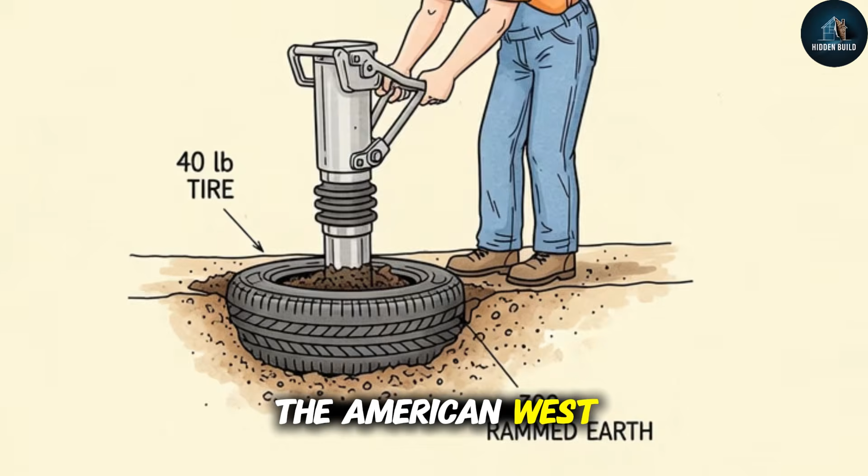The tire weighed 40 pounds. He had a theory that you could pack 300 pounds of rammed earth into it, stack hundreds more just like it into a thick curved wall, and build a structure so thermally massive that it would hold a spring morning's temperature through the worst blizzard New Mexico could produce. No furnace, no air conditioning, no utility hookup, no bill ever.

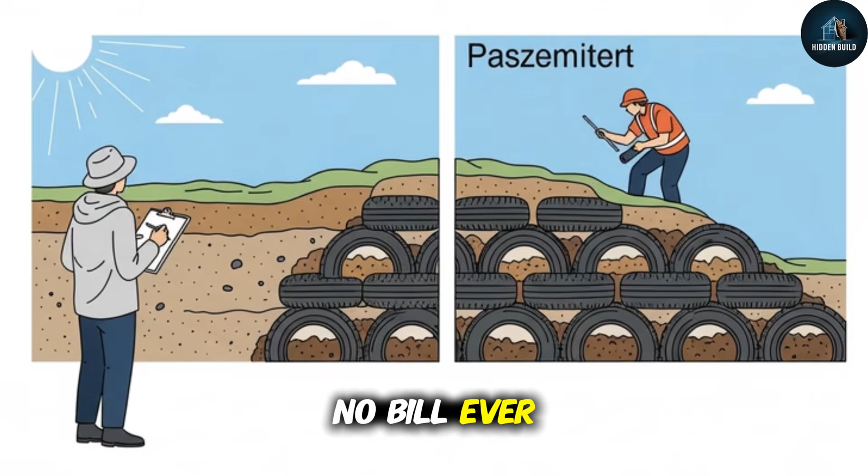He tested it. It worked. He tested it again. It kept working. Over the next 17 years, Reynolds built 32 of these houses in the desert outside Taos.

In the winter of 1993, a National Geographic photographer visited the Earthship built by television actor Dennis Weaver in Ridgway, Colorado. The temperature outside registered 8°F. Inside, 70 degrees, no furnace running. The photographer told his editor the instruments must have been wrong.

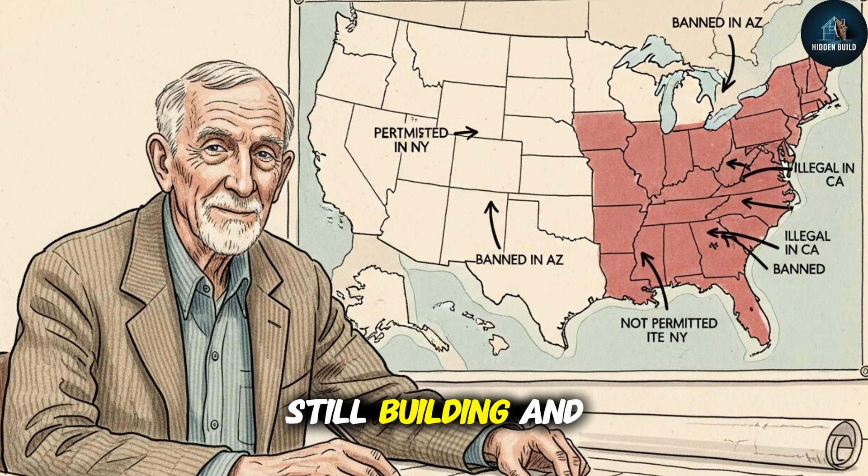His editor agreed. 53 years later, Michael Reynolds is 79 years old, still building and still banned in 48 states. The houses are still warm. This is the story of the house that heats itself forever, and the architecture license they revoked to make sure you never build one.

The archive opens outside Taos, New Mexico, in the autumn of 1974. Reynolds is 29 years old, freshly suspended from architectural practice for the preliminary work he has already done, and he's building what will become known as the Thumb House. The budget is $6,000. The primary structural material is used car tires collected free from the same garbage dump where the idea began. The construction method is not complex.

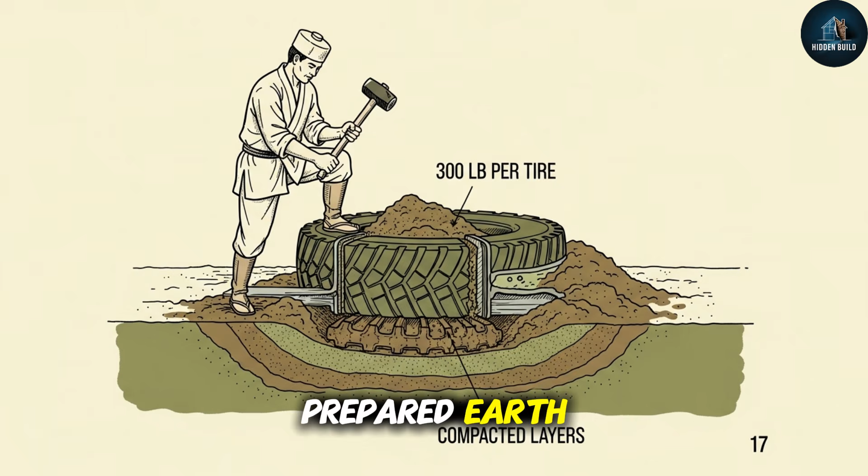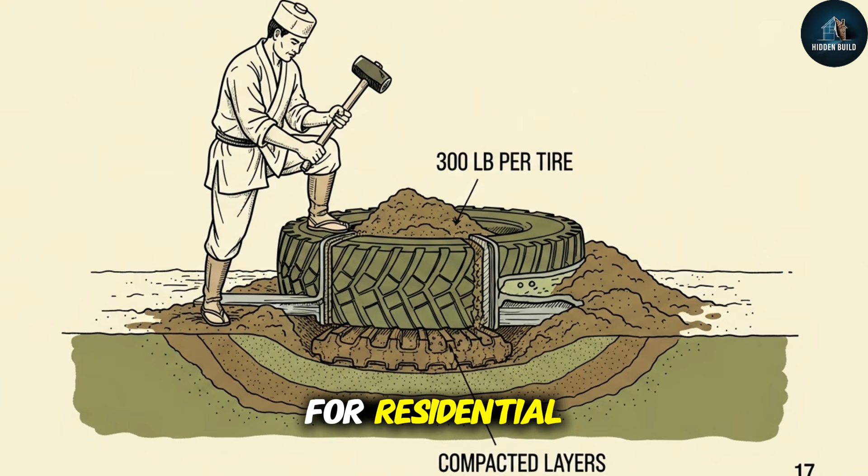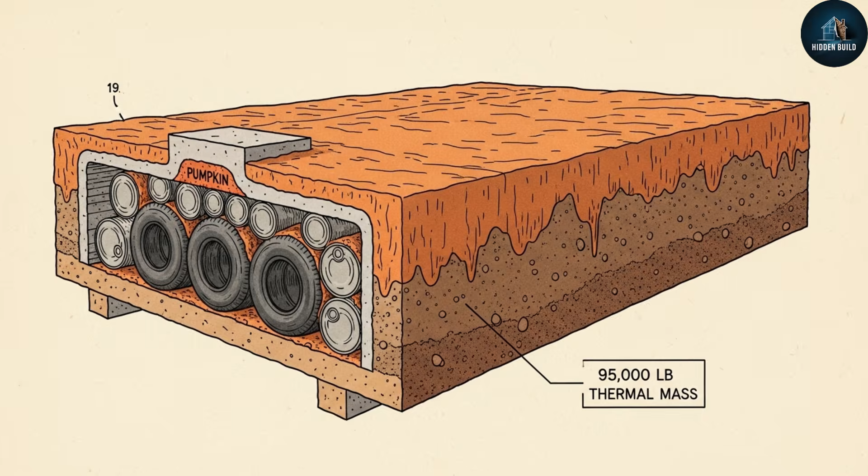A tire is laid flat on prepared earth. A sledgehammer drives loose soil and subsoil into the cavity of the tire - 300 pounds per tire, compacted in layers, until the rubber shell holds a brick that does not rot, does not corrode, and achieves a compressive strength that later materials testing against ASTM standards will confirm exceeds the minimum requirement for residential load-bearing walls. Hundreds of these tires are stacked in offset rows, the gaps between them filled with aluminum cans set in concrete and recycled glass bottles. The whole mass covered with earth plaster.

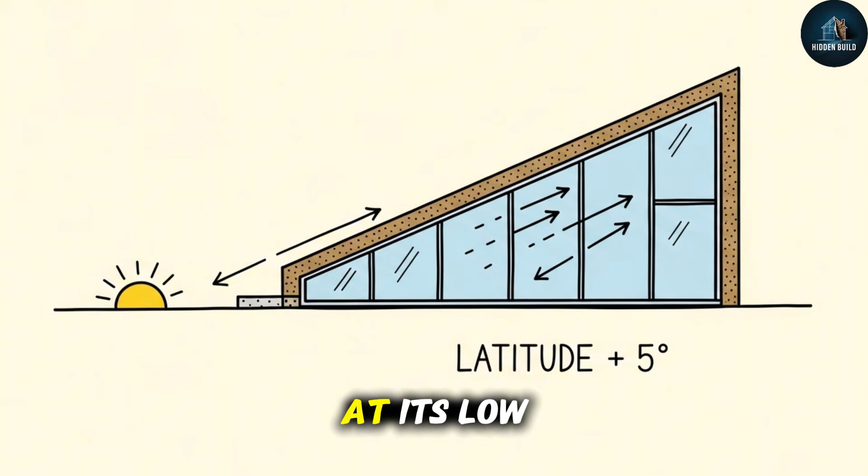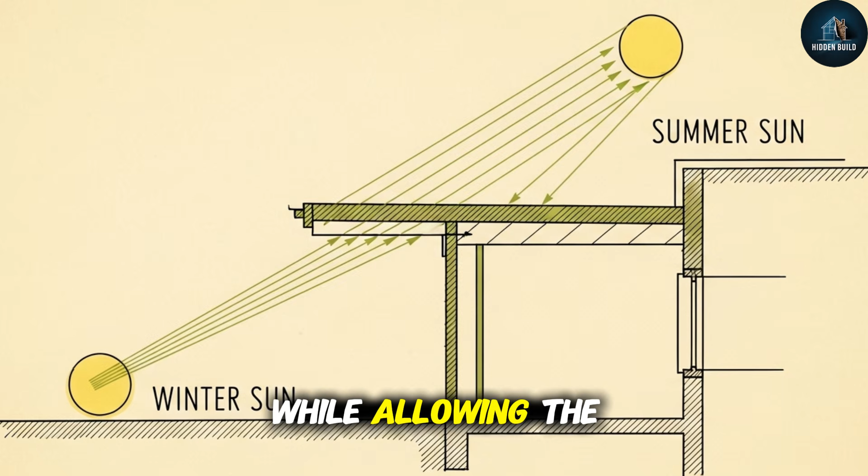The resulting wall is approximately 30 inches thick, with a total thermal mass in a standardized home of roughly 95,000 pounds. The south face of the structure is floor-to-ceiling glass, angled at the latitude plus 5 degrees, calibrated to catch the winter sun at its low angle. A roof overhang, calculated to the solar geometry of the site, blocks the high-angle summer sun entirely, while allowing the low-angle winter sun to penetrate the full depth of the interior.

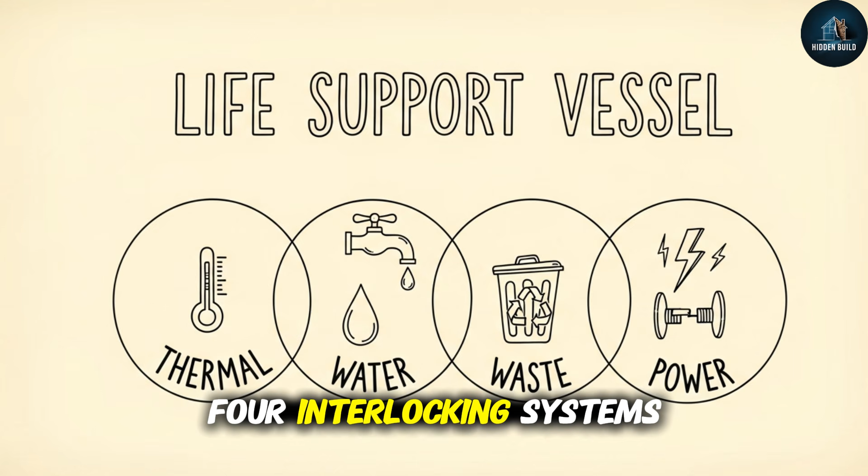The geometry is self-regulating. No thermostat, no sensors, no controls, no moving parts. That is the heating and cooling system. But Reynolds was not building a temperature experiment. He was building a complete life support vessel. And the thermal system was only the first of 4 interlocking systems that together eliminate every recurring utility cost a conventional house carries.

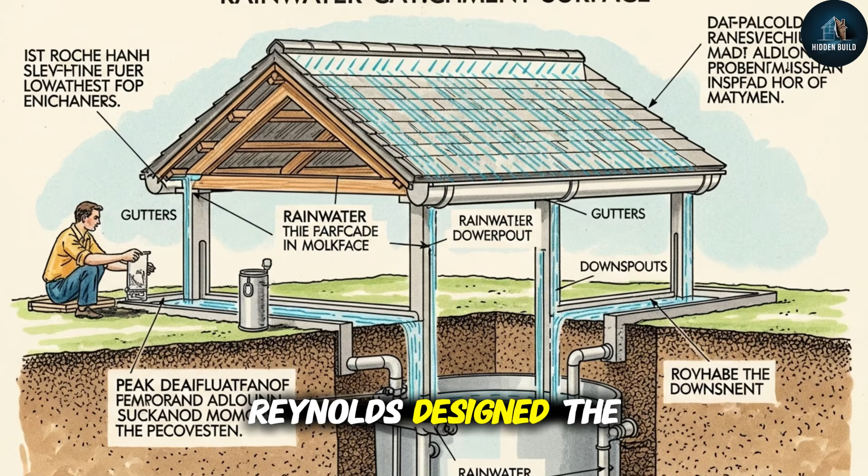The second system is water. Reynolds designed the roof to function as a catchment surface, channeling 100% of rainfall through gutters into underground cisterns, typically 10,000 to 30,000 gallons depending on the household's needs. The water passes through 4 filtration stages before it reaches a kitchen tap, beginning with a coarse filter at the system inlet and ending with a ceramic carbon filter at the point of use.

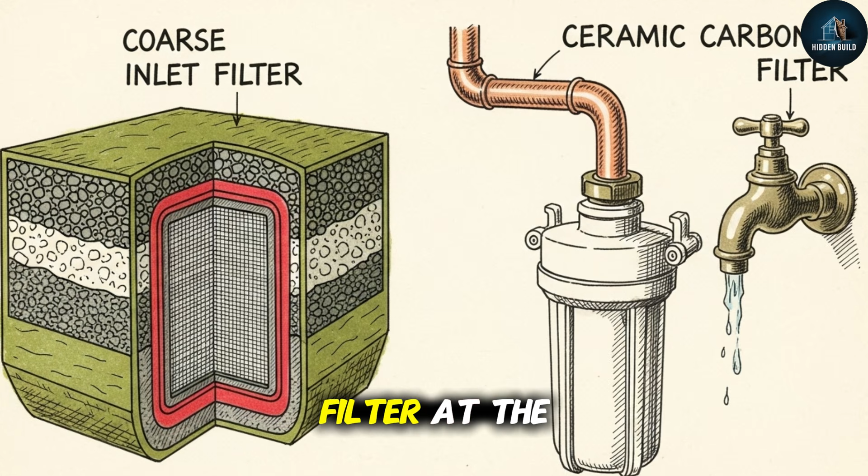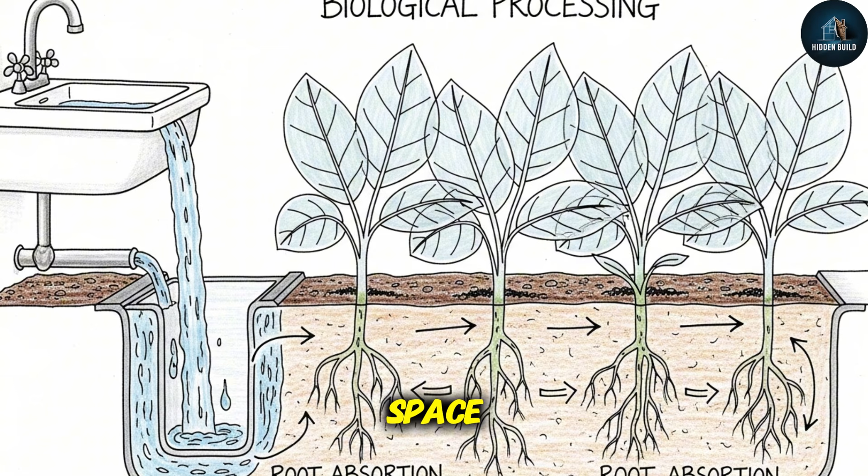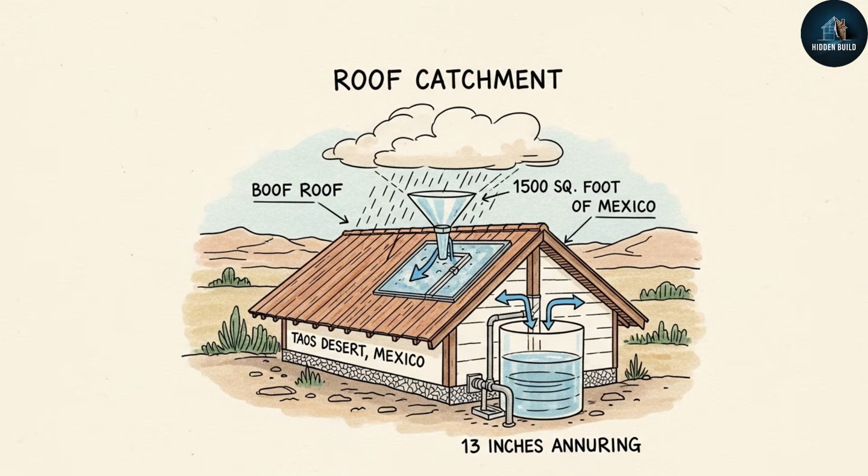The gray water from sinks and showers then flows into a contained indoor botanical cell, a planter bed inside the living space where plants process the water biologically, removing nutrients and pathogens through root absorption. That water exits the indoor cell and feeds an outdoor botanical cell, then continues to a toilet flush reservoir. 1 gallon entering the system serves 4 uses before it leaves. In Taos, New Mexico, which receives 13 inches of rainfall annually, a 1,500 square foot roof catchment area collects enough water for 2 adults with a 30% surplus.

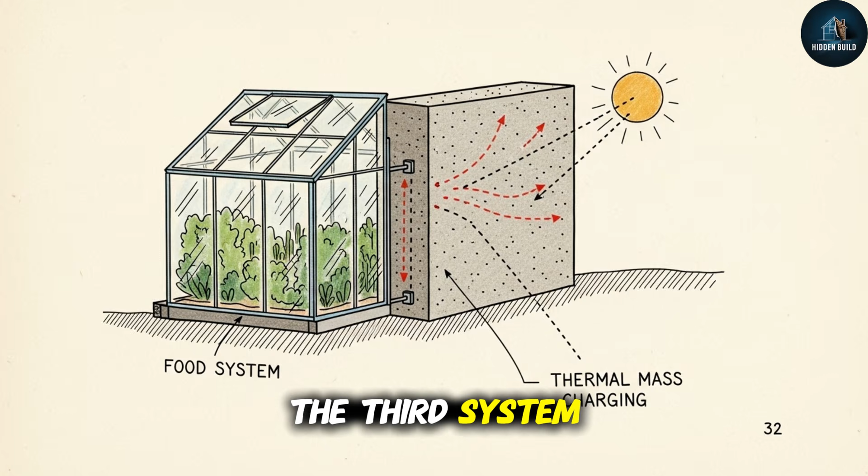The third system is food. The south-facing greenhouse zone that charges the thermal mass is not wasted space between uses. Reynolds designed it as a year-round growing area. Residents at the Greater World community grow bananas, papayas, citrus, and tropical vegetables at 7,000 feet elevation in a climate that sees snow in May. The greenhouse does not require supplemental heating because the thermal mass behind it maintains the zone temperature above freezing through all but the most extreme cold snaps.

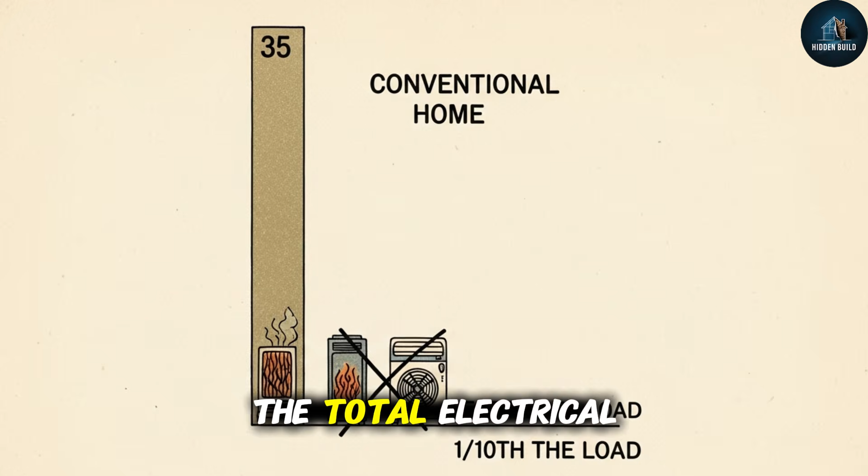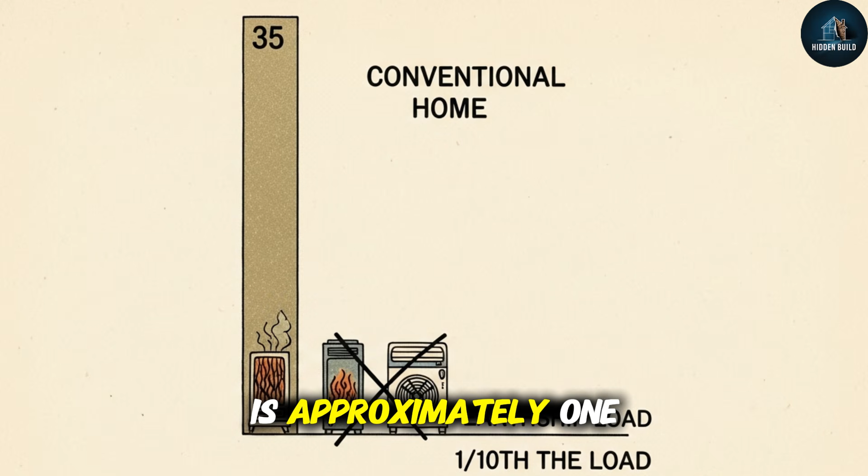The fourth system is electricity. The total electrical load of a house with no furnace, no air conditioner, no electric water heater, and no pump running on continuous supply pressure is approximately 1/10 of a conventional American home's load. A photovoltaic array of 1 to 3 kW combined with a 48V battery bank powers lighting, refrigeration, communication, and small appliances indefinitely.

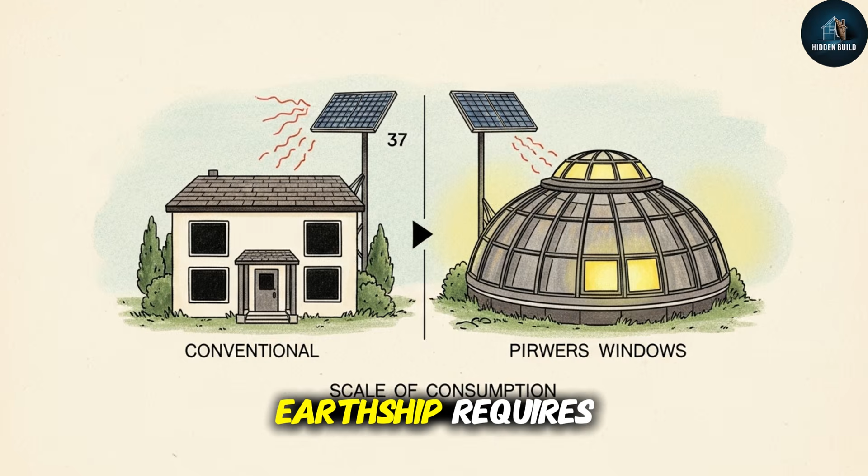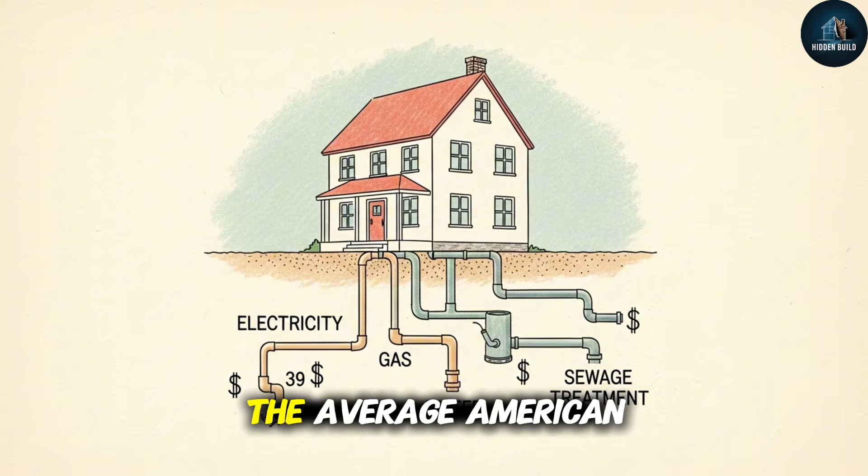At the scale of consumption an Earthship requires, the solar installation that would be inadequate for a conventional home is more than sufficient. These four systems together eliminate the utility bill entirely. Not reduce, eliminate. The average American household pays separately for electricity, gas or heating fuel, water, and in many cases, sewage treatment. An Earthship resident pays for none of these.

The construction cost, which is comparable on a per-square-foot basis to conventional construction because of the labor intensity of rammed earthwork, is the last payment the house ever requires.

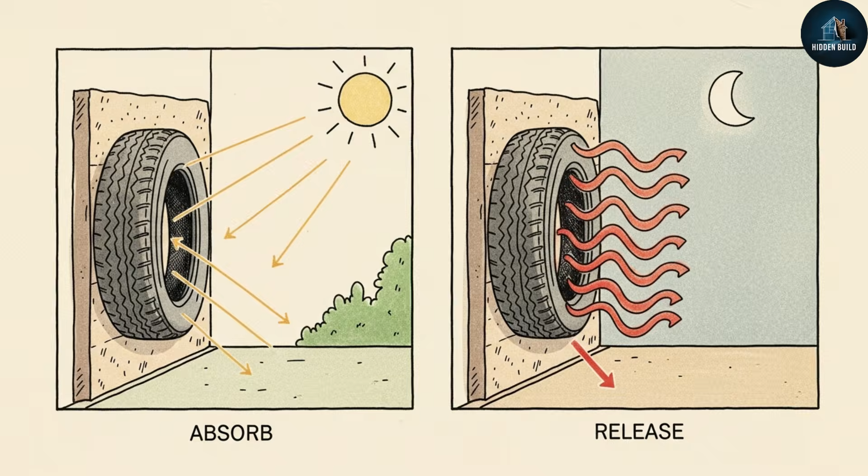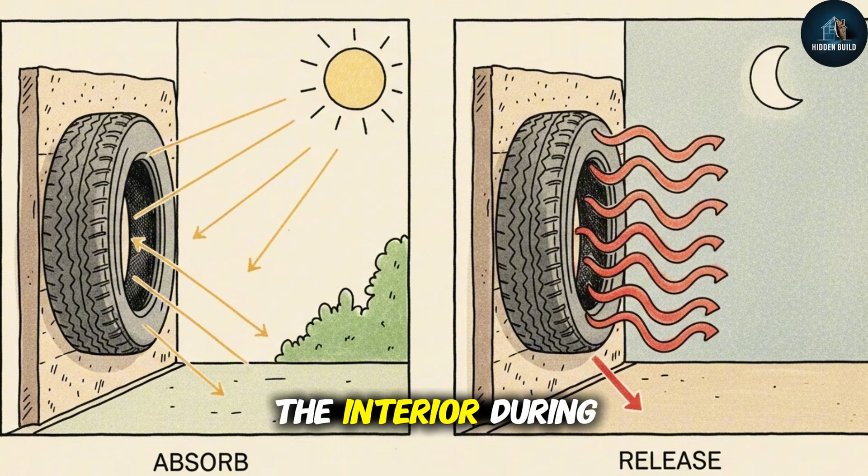Here is the physics as plainly as it can be stated. Dense mass absorbs heat slowly and releases it slowly. The tire walls absorb solar energy during daylight hours and return the stored heat to the interior during the cold night, running a daily thermal cycle that requires no fuel input.

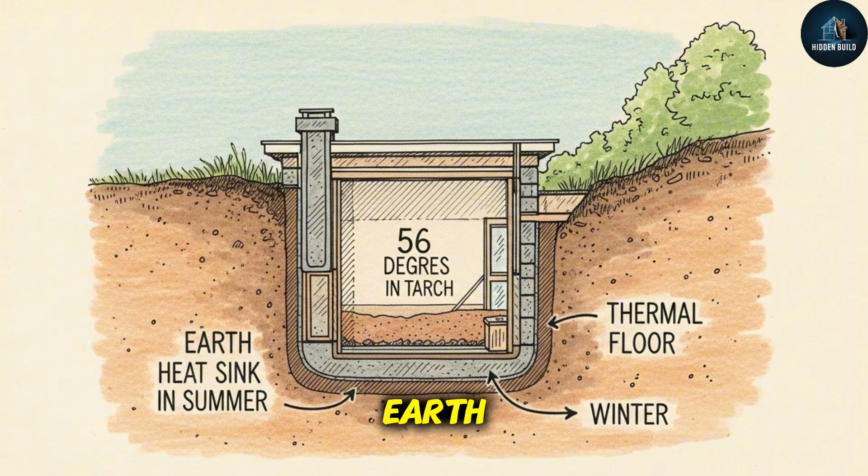The south glass is the charging mechanism. The roof overhang is the seasonal switch. The buried rear wall, partially set into the hillside, draws on the constant 56-degree temperature of the Earth at 4 feet depth, which acts as a thermal floor in winter and a heat sink in summer.

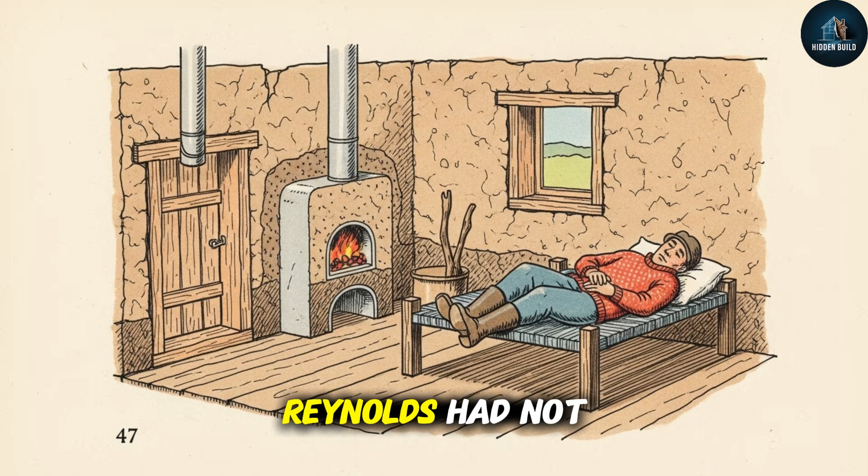That first winter, the temperature outside the thumb house dropped to 12 degrees Fahrenheit for 3 consecutive nights. Reynolds had not installed a furnace. He slept in the house anyway. The interior temperature held at 60 degrees. He wrote one sentence in his journal that night: The walls knew what to do.

He was not, in 1974, thinking about the industry. He was thinking about physics and garbage and the possibility that a house could stop costing money the moment it was finished. But here is what the thumb house threatened.

Whether Reynolds understood it at the time or not, the United States residential energy market generates approximately $450 billion in annual revenue. Heating and cooling account for roughly 48% of that figure. Every dollar of that $450 billion flows through a supply chain: fuel producers, utility companies, HVAC manufacturers, their parts and refrigerant suppliers, their installation contractors, their maintenance networks.

A house that heats and cools itself permanently does not participate in that supply chain. Not partially, not with exceptions, permanently. From the day it is completed, it requires nothing from anyone.

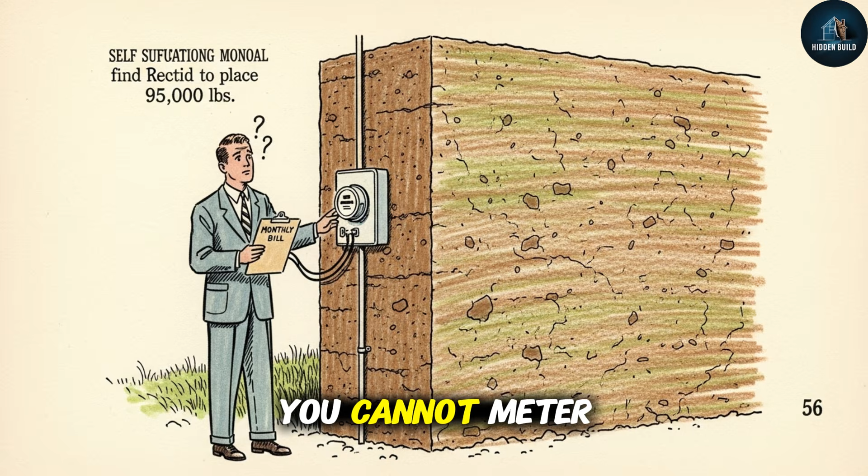You cannot meter a tire wall. You cannot send a monthly bill to 95,000 pounds of rammed earth. You cannot charge for the slow release of stored solar heat. The house that needs nothing is, from the perspective of every business model built around selling heating and cooling as a recurring service, not just competition. It is a category error. It is the wrong kind of solution to the problem.

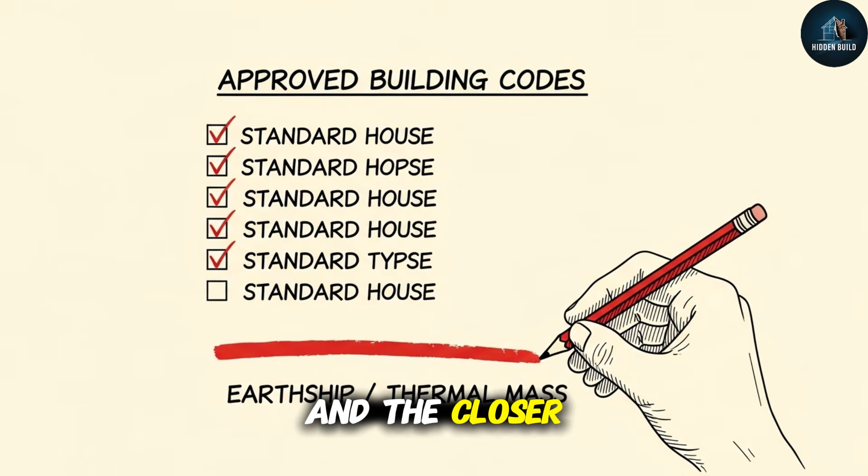And the closer it comes to looking like the right answer, the more necessary it becomes to keep it off the approved list. Reynolds spent the next 15 years refining the design.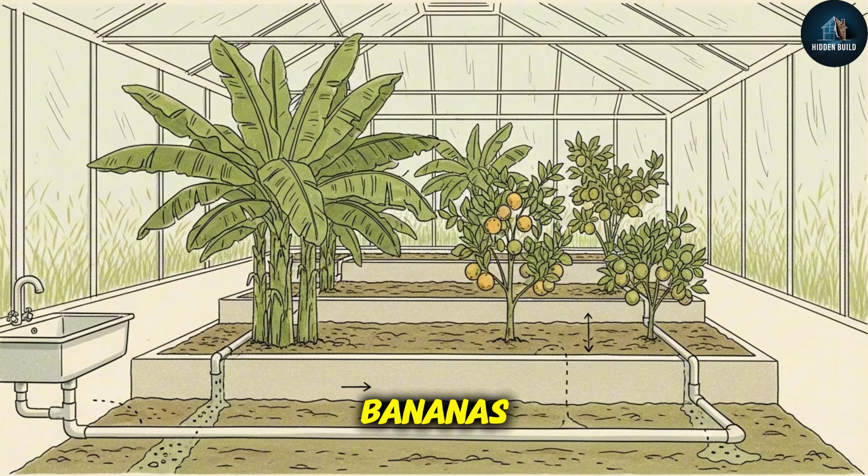Better roof catchment systems feeding underground systems, indoor greenhouse zones using gray water from sinks and showers to grow bananas, papayas, and citrus at an elevation where standard gardens died in May.

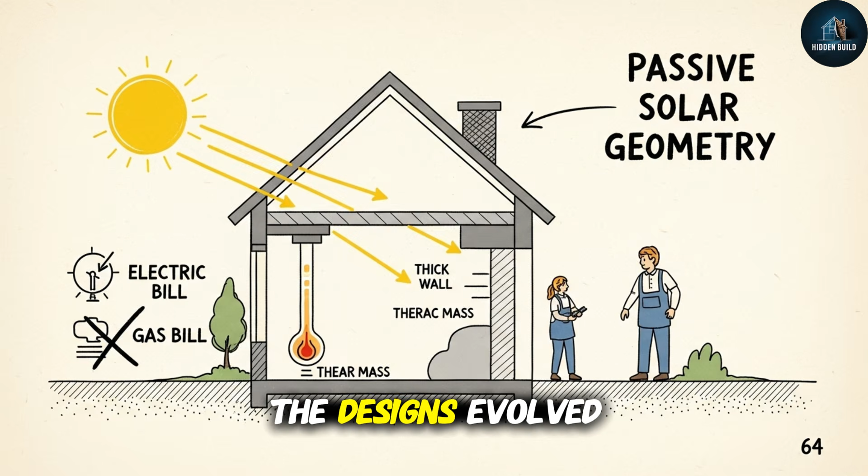Small photovoltaic panels running the minimal electrical load of a house, with no furnace, no air conditioner, and no water heater running on gas. The designs evolved. The core remained: thermal mass, passive solar geometry, and the deliberate elimination of every system that required a monthly payment to operate.

By the late 1980s, Reynolds had built enough structures, and enough of them had performed well enough for long enough that the New Mexico Construction Industries Division could no longer ignore him. In 1989, they revoked his architecture license. The stated reason? Building without proper permits, using materials not approved by applicable codes, and endangering public safety.

That last charge is the one worth examining most carefully. Not one of Reynolds's 32 structures had experienced a structural failure. Not one resident had been harmed. The New Mexico Construction Industries Division could point to 0 injuries, 0 collapses, 0 documented safety violations in any physical structure Reynolds had built.

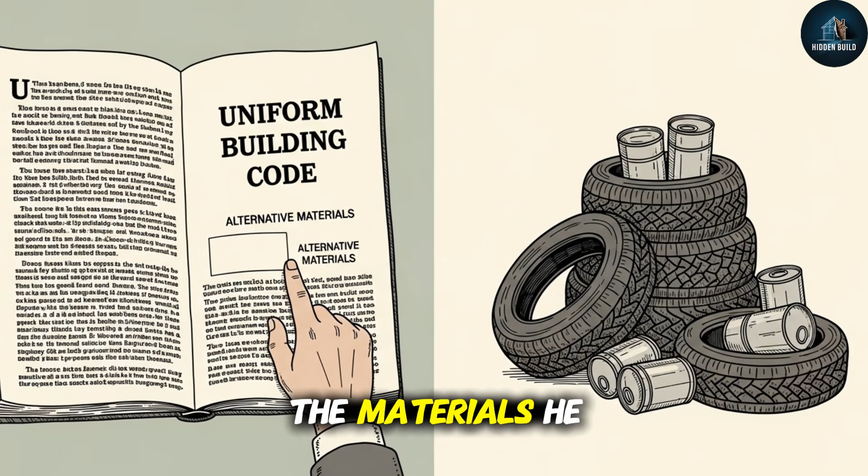What they could point to was that none of the materials he used appeared in the appropriate sections of the Uniform Building Code. The tires were not on the approved list. Therefore, under the law as written, the house was illegal. Whether the house was safe was a question that the approved list was not designed to ask.

Now, we need to talk about who wrote the approved list. The International Code Council is a private nonprofit organization headquartered in Washington, D.C. It writes the International Residential Code, the document that governs residential construction standards in all 50 U.S. states. It is updated every 3 years through a voting process.

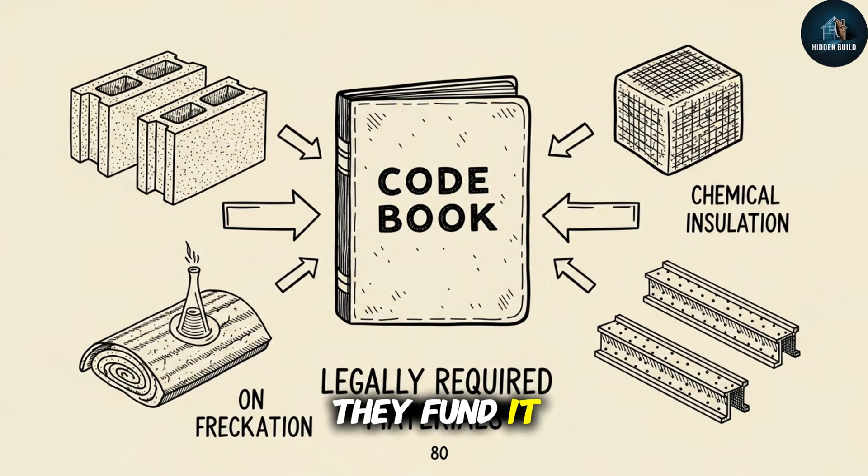The voting membership of the ICC includes building officials and representatives from the building products manufacturing industry. The corporate members of the ICC include the Portland Cement Association, the American Chemistry Council, the American Forest and Paper Association, the National Association of Home Builders, USG Corporation, and CertainTeed. These organizations do not fund the ICC out of civic generosity. They fund it because the ICC's output directly determines what materials are legally required in American residential construction. Their membership gives them a vote in the process that writes the rules their competitors must navigate to enter the market.

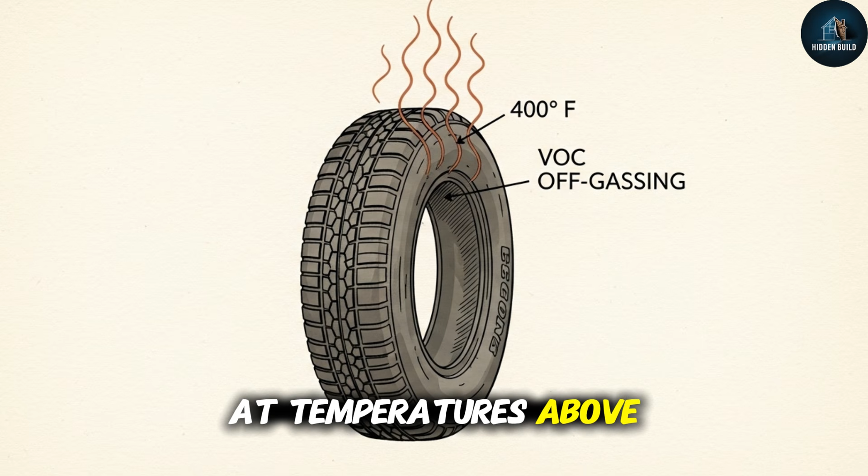Section R316 of the IRC prohibits the use of tires in habitable wall construction. The stated rationale: tires off-gas volatile organic compounds at temperatures above 400 degrees Fahrenheit.

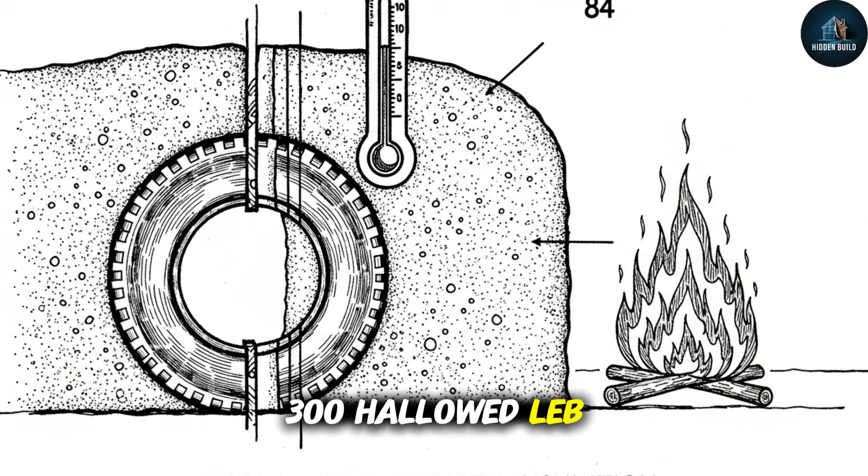Reynolds's counter-argument, confirmed by independent materials testing: tires encased in three hundred pounds of rammed earth never approach temperatures anywhere near 400 degrees. The structural mass surrounding them acts as thermal insulation that makes the fire scenario physically implausible in a buried wall.

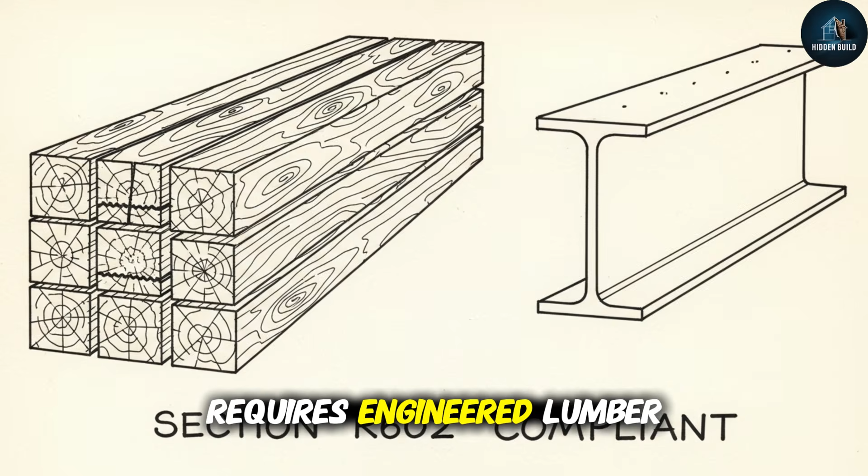Section R602 requires engineered lumber or steel framing as the residential structural system. An alternative structural system, meaning anything not on the approved list, requires a licensed structural engineer to certify the design with a professional stamp. Most structural engineers will not certify an Earthship structure, not because the walls fail under testing, but because no structural engineer wants to be the first in their jurisdiction to stake their professional license on something their errors and omissions insurance does not cover.

The certification pathway exists in theory. In practice, it requires someone to go first, and no one has a financial incentive to be first.

Giston Jacobson, Reynolds's longtime partner and co-director at Earthship Biotecture, summarized this in an interview that Reynolds has never publicly contradicted: the codes were never written to keep people safe. They were written to keep people paying.

Reynolds appealed the license revocation. His license was partially restored in 1994 with conditions restricting him from commercial practice. He established Earthship Biotecture as a formal company. He published three volumes on Earthship construction that became the most widely referenced off-grid building documents in the world. He kept building.

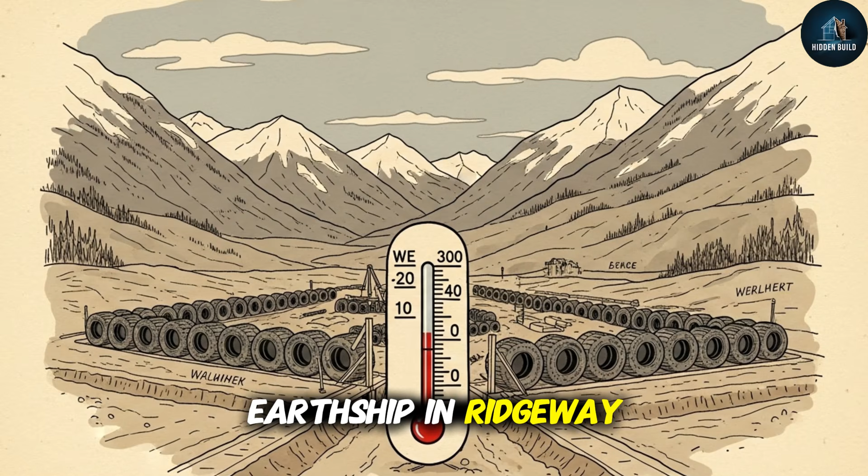Dennis Weaver understood the idea before most architects did. Weaver, best known as the actor Chester on Gunsmoke for 9 seasons, had made enough money to build whatever house he wanted. He visited Reynolds's compound in the late 1980s and commissioned an Earthship in Ridgway, Colorado, at an elevation of nearly 7,000 feet, in a valley that experiences sustained periods of negative temperatures every winter.

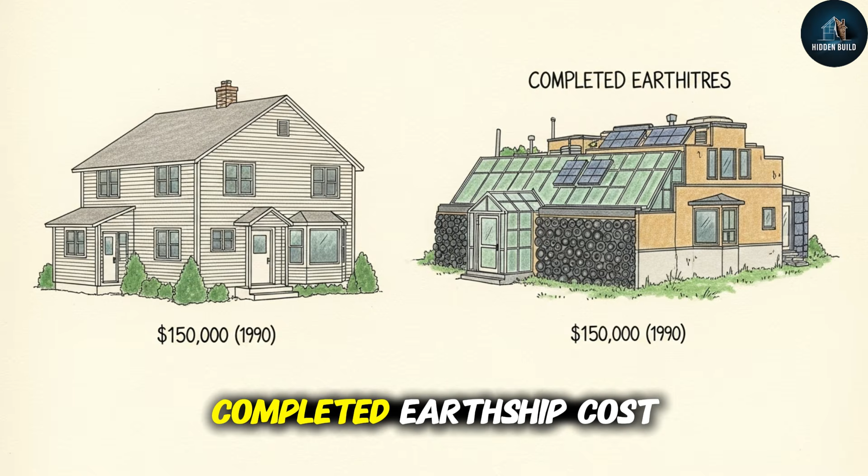His completed Earthship cost $150,000, which by 1990 was the cost of a modest conventional home in the same area. He spent nothing on heating after the day it was finished. He spent nothing on cooling. He grew food in the greenhouse through Rocky Mountain winters.

He died in February of 2006 at the age of 81 in the house, on a day when the temperature outside was below zero. The family reported the interior temperature at the time of his death as 70 degrees. No furnace running, no fuel burned, 70 degrees, on the day he died.

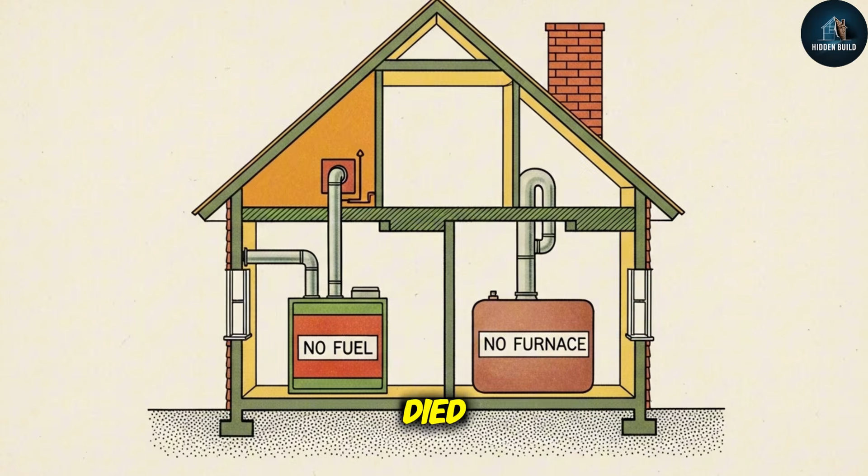In 2007, a documentary film called Garbage Warrior followed Reynolds through his legal battles and into his fieldwork. It reached over 10 million views online. The international response was immediate. Belgium, France, Scotland, Bolivia, Argentina, Cambodia, Malawi were all building Earthships with government support, in countries where the International Residential Code either did not apply or had been adapted to accommodate alternative materials.

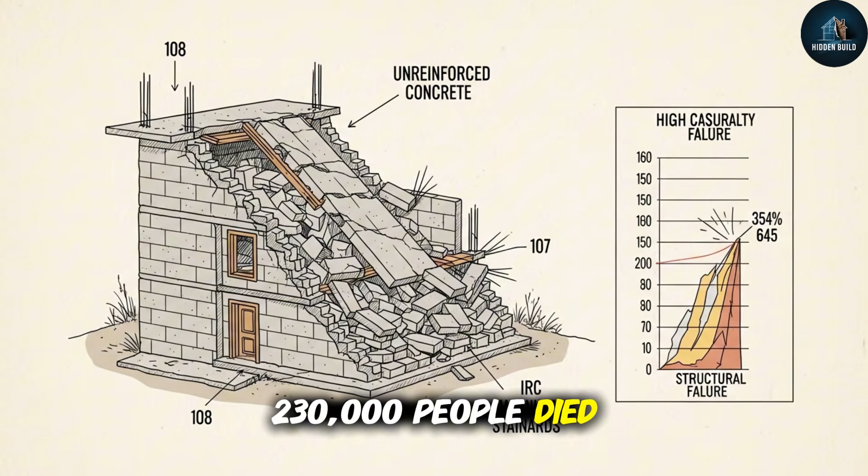Then, in January of 2010, a 7.0 earthquake struck Haiti. 230,000 people died. The damage was concentrated in exactly the type of construction the IRC had promoted for 50 years: concrete block, unreinforced, built to minimum standards.

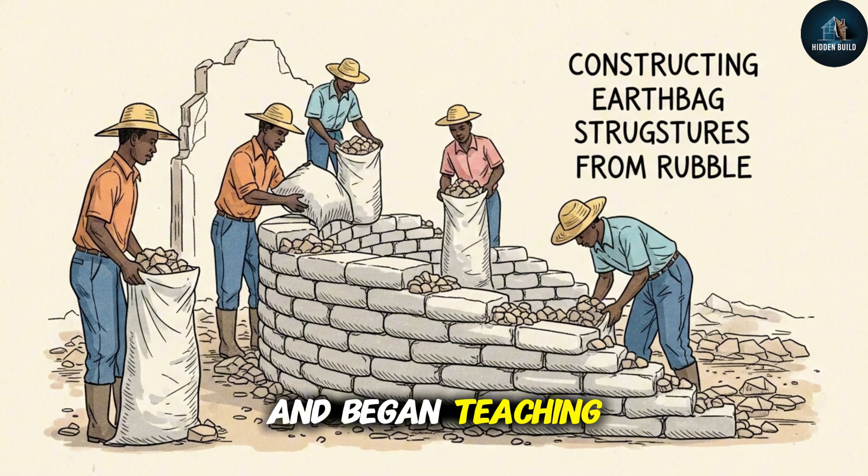Reynolds mobilized a volunteer team within 72 hours. He flew to Port-au-Prince and began teaching Haitian builders to construct earthbag structures from the rubble of the buildings that had just killed 230,000 people.

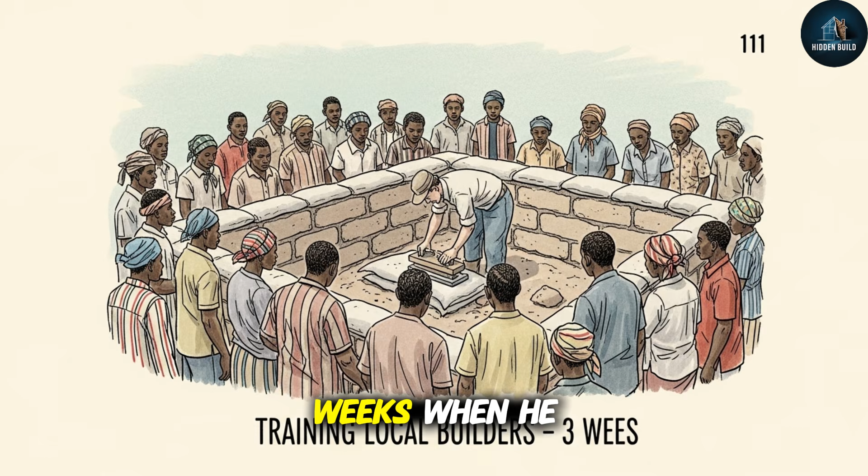In 10 days, 6 demonstration structures were complete. The Haitian government formally invited him to continue. He stayed 3 weeks. When he left, 30 Haitian builders had been trained in the method. FEMA's prefabricated temporary housing units, at approximately $10,000 each, began arriving in Port-au-Prince the following month.

Now, stand inside an Earthship in Taos. It is the second week of January. The outdoor temperature this morning is 4 degrees Fahrenheit. The sky is cloudless. The light on the high desert is flat and silver in the way of winter mornings at 7,000 feet, brilliant and cold at once, a light that carries the idea of warmth but not the substance of it.

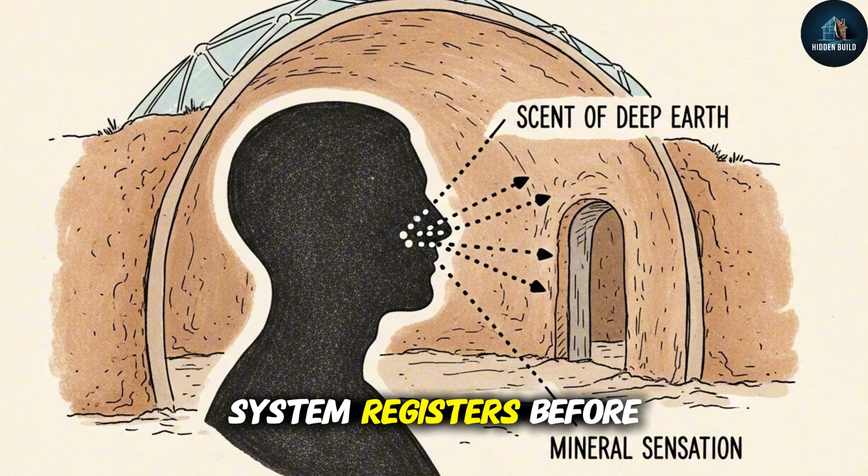You walk through the entry. The air changes immediately, not the temperature yet, the air itself. It is still, with a quality that resembles the interior of a stone building in summer. Slightly pressured, cool without being cold, carrying a faint mineral scent that your nervous system registers before your mind has time to interpret it. The scent of deep earth, the scent of mass.

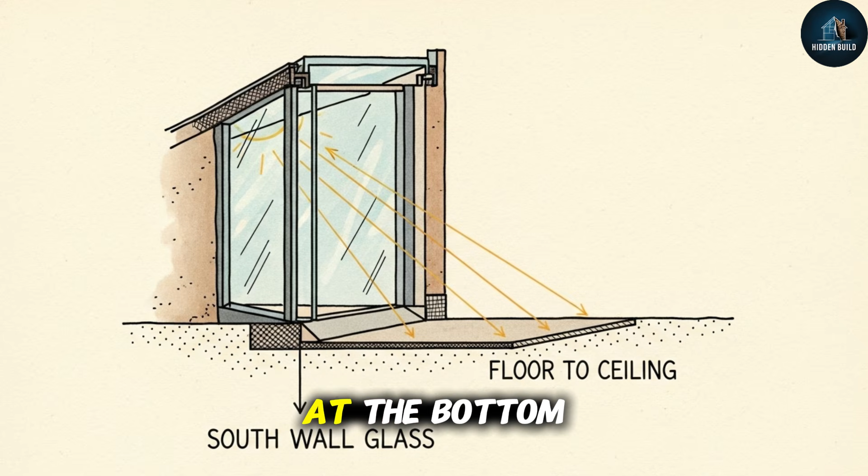The south wall ahead of you is glass, floor to ceiling, angled slightly outward at the bottom. The winter sun falls through it and lies in flat rectangles across the earth floor. In the greenhouse zone between the glass and the main living space, banana plants push toward the roof, broad green leaves that have no rational business being here. It is January, 7,000 feet elevation, high desert of northern New Mexico, and the nearest tropical climate is 2,000 miles south. The banana plants do not appear to know this.

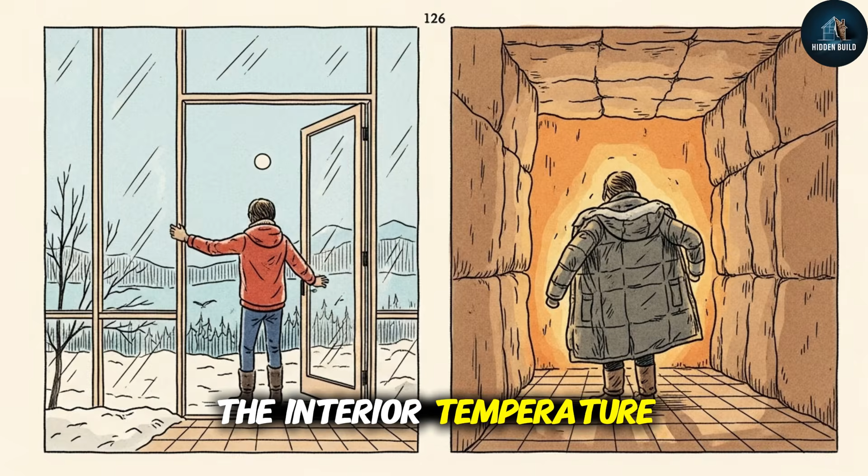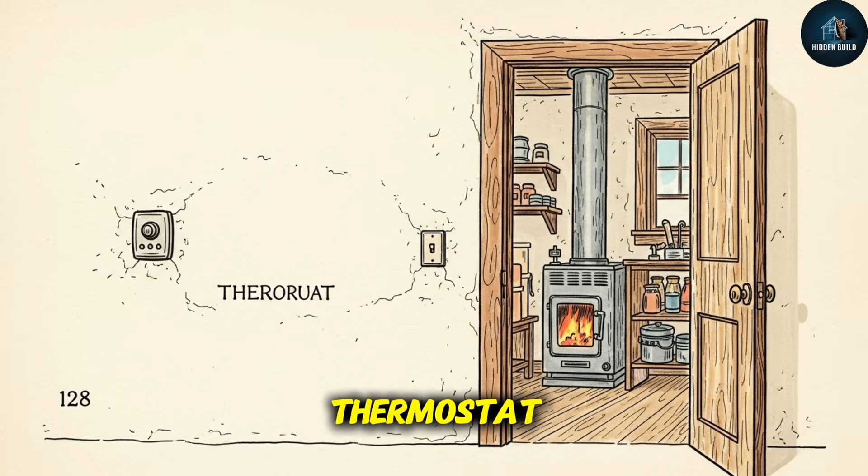You move deeper. The glass recedes. The walls thicken around you. You pull off your coat. The interior temperature is 68 degrees Fahrenheit. It has been approximately 68 degrees, varying no more than 4 degrees in either direction for the past 4 months. You look for the thermostat. There is none. There is no furnace in the utility room, because there is no utility room.

There is a small wood stove in the corner, installed as a precaution by the original builders, and the kindling beside it has not been touched since September.

Press your hand flat against the interior tire wall—not your fingertips, your whole palm. It is warm, not room temperature. Warm, the way a stone wall feels when it has been absorbing sun all day, except this wall has been absorbing it for 4 months.

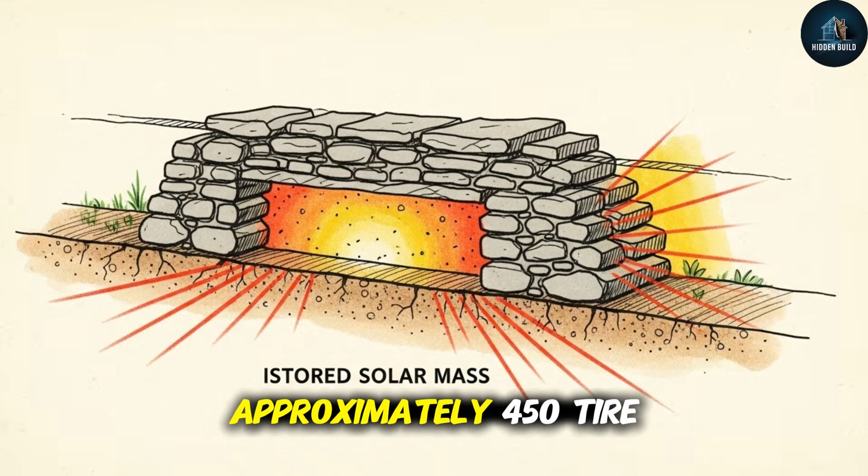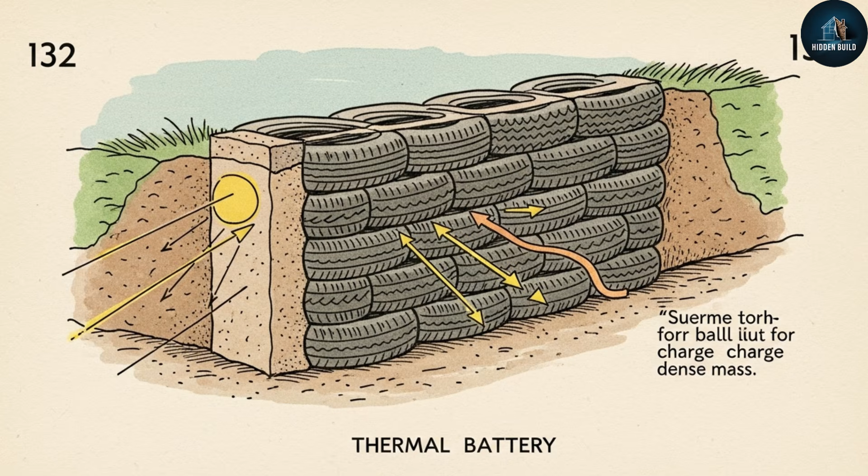Approximately 450 tire-days of solar charging, representing a thermal battery with a capacity calibrated to the climate of Taos in winter—enough stored heat to maintain 68° through the longest cold night, releasing it at the rate the interior air requires. No faster, no slower, without a control system, without a sensor, without a single decision being made by any mechanism more sophisticated than the physics of dense mass.

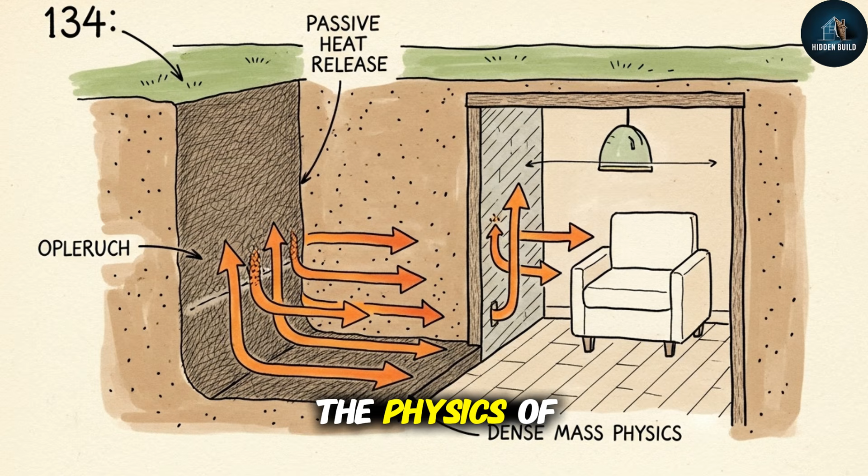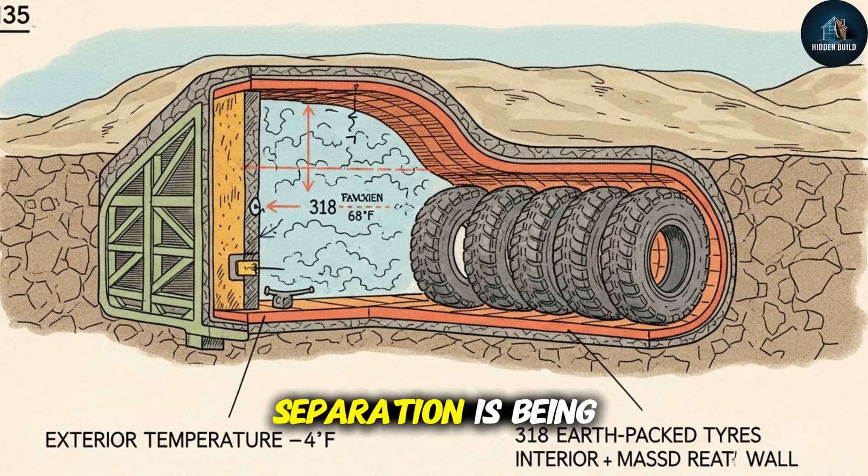Outside, -4°F, inside 68. The difference between those two temperatures, 70 degrees of separation, is being maintained right now by 318 tires, packed with approximately 95,000 pounds of compacted earth.

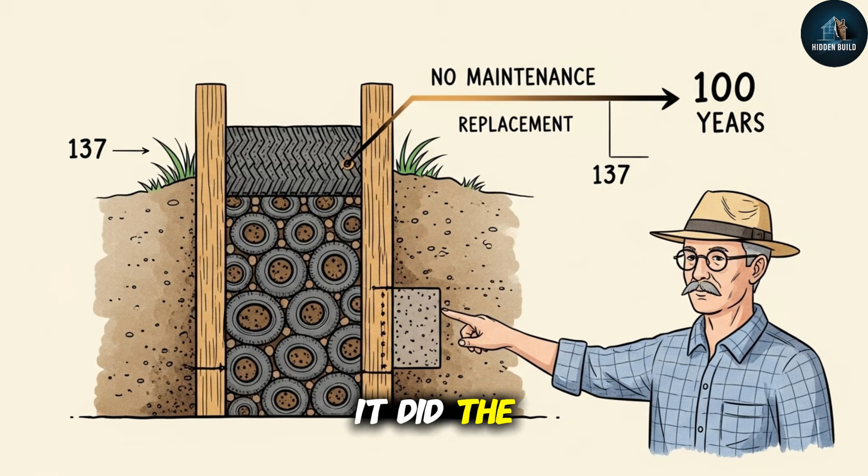The tires cost nothing to collect. The earth cost nothing to excavate. The labor happened once, and now it continues doing what it did the day it was finished, and will do the same for the next 100 years without maintenance, without replacement, without a single payment to anyone.

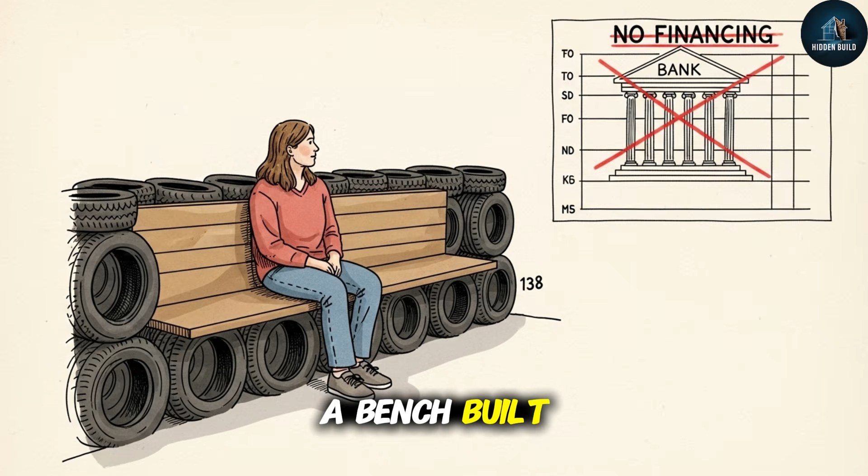You sit on a bench built into the tire wall—the wall that no bank will finance, that no licensed contractor in 47 states would build under a permit. The bench is warm from the stored heat of 3 months of winter sun.

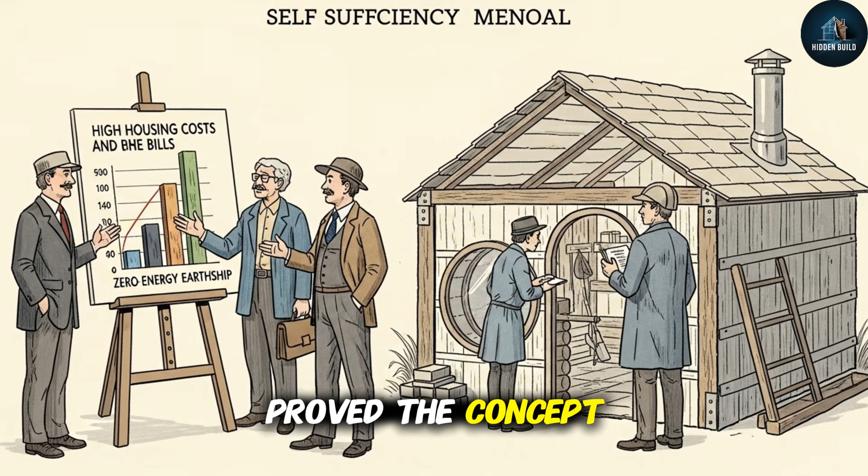Outside, 4, inside 68. The question that occurs to you is not how. The physics is not a mystery—Reynolds explained it in 1974, and it has not changed. The question is, why? In the 50 years since the Thumb House proved the concept, with energy costs averaging $2,500 per household per year,

and rising, with a housing crisis that has pushed the median American home price past $300,000, with peer-reviewed performance data confirming what Reynolds demonstrated in the desert, has the structure that makes no energy bill necessary remained illegal in 48 states?

The Prescott College study, completed in 2001, monitored 14 Earthships across 18 months of weather that ranged from 17 to 108°F. Not one structure fell below 60°F in their interior.

The study is publicly available. It has been cited in academic literature. It has never been cited in an International Code Council update proceeding.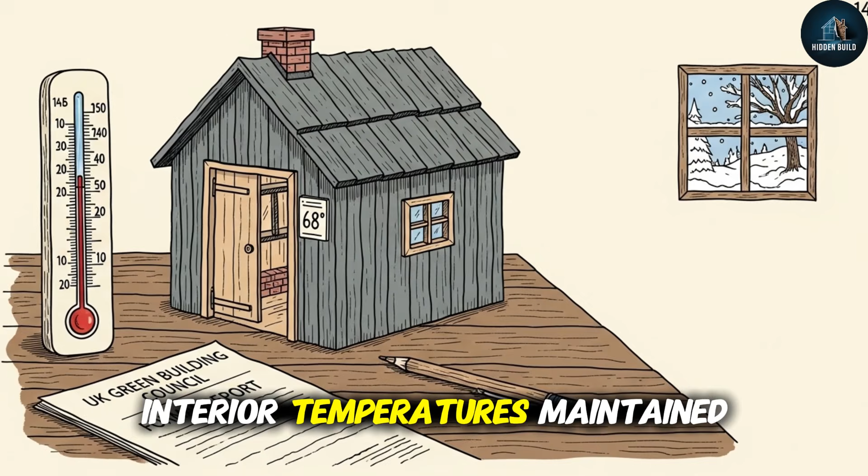The Brighton Earthship in East Sussex, England, was monitored by the University of Brighton across 9 years of occupancy. Results published through the UK Green Building Council: interior temperatures maintained 68° average through British winters, reaching down to 14°F, with no mechanical heating.

The data is in peer-reviewed form. It has never been cited in an ICC update proceeding.

Earthship Fife in Scotland was independently surveyed by Fife Council after construction. The formal report concluded that the structure met, and in several parameters exceeded, the standards required for habitable residential occupation.

Scotland sits at 56° north latitude. Taos sits at 36. If the system performs in Scotland, it performs everywhere. This survey has never been cited in an ICC update proceeding.

What gets cited in ICC update proceedings consistently, across multiple update cycles, are submissions from the organizations that fund the ICC's operations and hold votes in the process that writes the rules.

Reynolds testified before the ICC in 2012 and again in 2015. Both testimonies are public record. Both were rejected without substantive technical rebuttal.

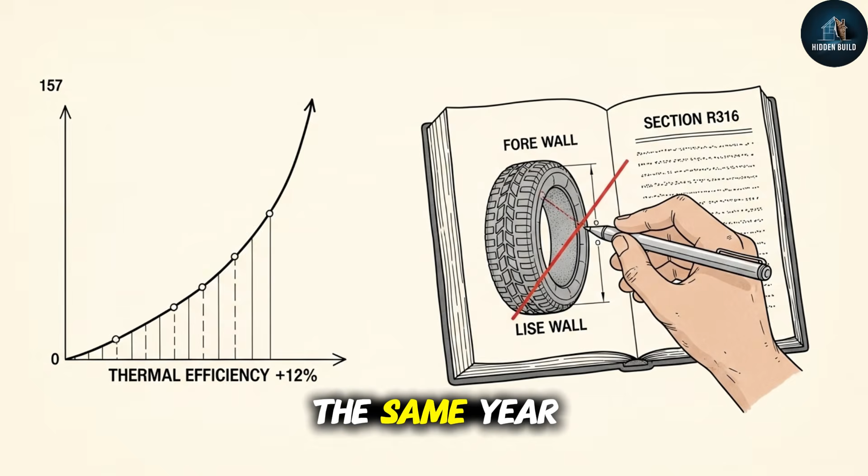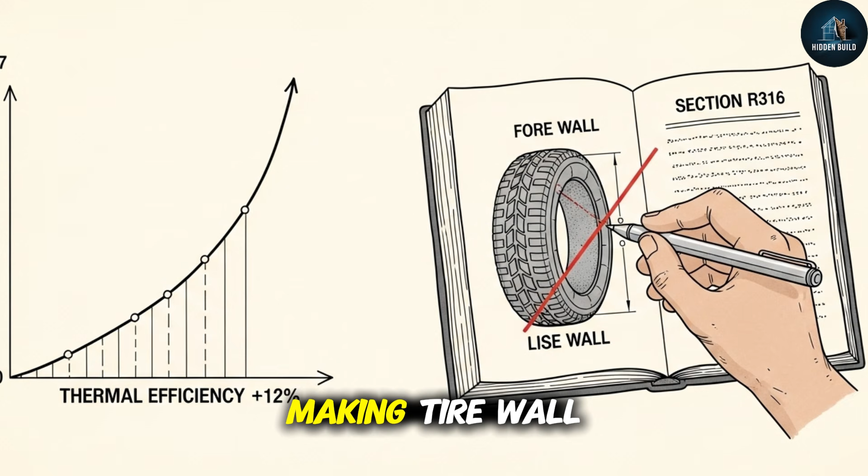In 2012, the same year Brighton published its first decade of performance data showing thermal efficiency exceeding model projections by 12%, the ICC added language to Section R316, making tire wall construction explicitly non-compliant.

With no data threshold that would trigger review, no pathway from documented proof to legal permit, he flew back to Taos and built another house.

He is 79 now. The Greater World Earthship community northwest of Taos covers 634 acres and contains over 70 completed structures. Lot prices run from $40,000 to $120,000.

Pre-built Earthships have a waiting list of 18 months. The average utility bill among residents is $247 per year, mostly internet service. The average energy bill is zero. The owner-builder exemption is the crack in the wall.

44 U.S. states have provisions allowing individuals to construct their own primary residence without a contractor's license or a code inspection, provided they personally occupy the structure. Reynolds' company estimates that between 200 and 400 Earthships are completed annually in the United States under this exemption — houses that pay zero energy bills, built by people who found the legal pathway the code left open because it was written for someone else.

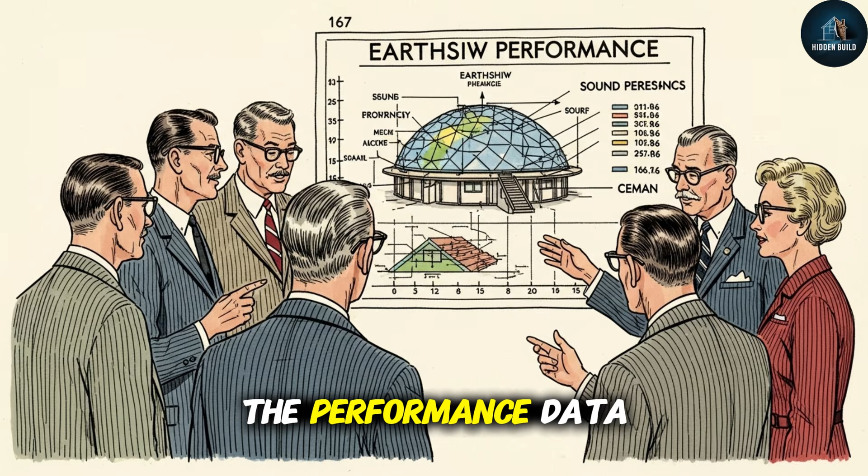Belgium, France, Scotland, Bolivia, Argentina, Nepal, Cambodia, Malawi have built Earthships under standard building permits. Their governments reviewed the performance data and found the construction sound. In countries that did not inherit the International Residential Code as written, the Earthship is not a workaround. It is simply a building.

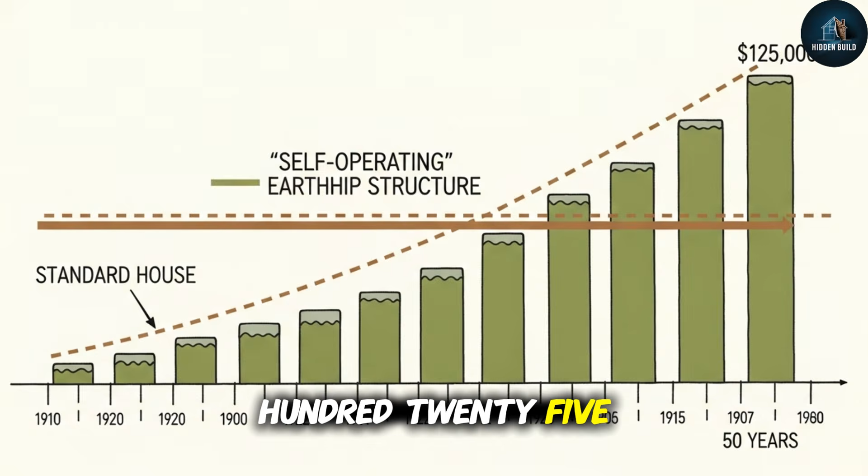The average American household spent $2,511 on energy in 2024. Over 50 years, adjusting conservatively for inflation, that household will spend $125,000 to operate a structure that has been demonstrated across 3 continents and 50 years of documented performance to operate itself. $125,000 — that is the cost of Section R316.

That is what the absence of one material from one approved list, maintained by one private nonprofit, funded by the industries that sell the competing materials, costs the average American household measured across a lifetime.

Reynolds will testify again at the next code update cycle. The transcript will again be public record. The vote may again go the same way, and in 44 states the owner-builder exemption will still be open. The physics will still be true. The tires will still be free.

There is something particular about a building technique that was banned not because it failed, but because it succeeded. The usual arc of a suppressed technology is that it had a flaw, or it arrived before the market was ready, or the alternatives were simply cheaper. Reynolds' Earthship has none of those explanations available to it.

The Thumb House worked in 1974. It worked in 1989 when they took his license. It worked in 2001 when Prescott College published the data. It works today in the Scottish Highlands and in a Belgian city, and in 70-plus structures in the New Mexico desert, in every climate where it has been built and monitored.

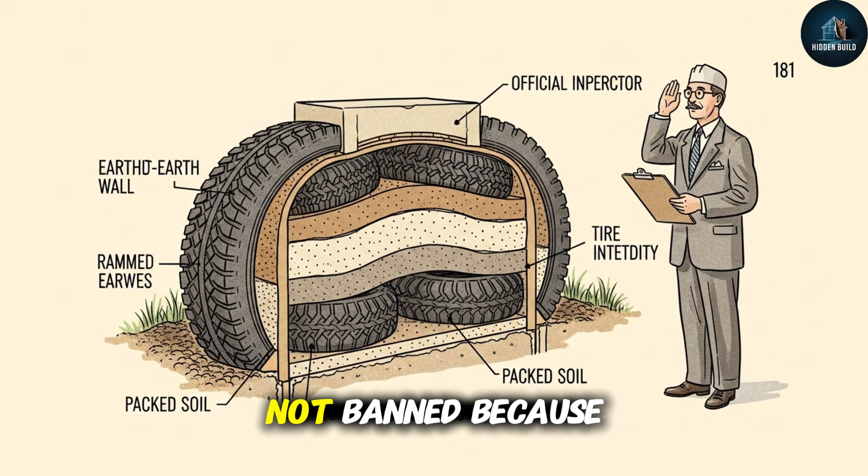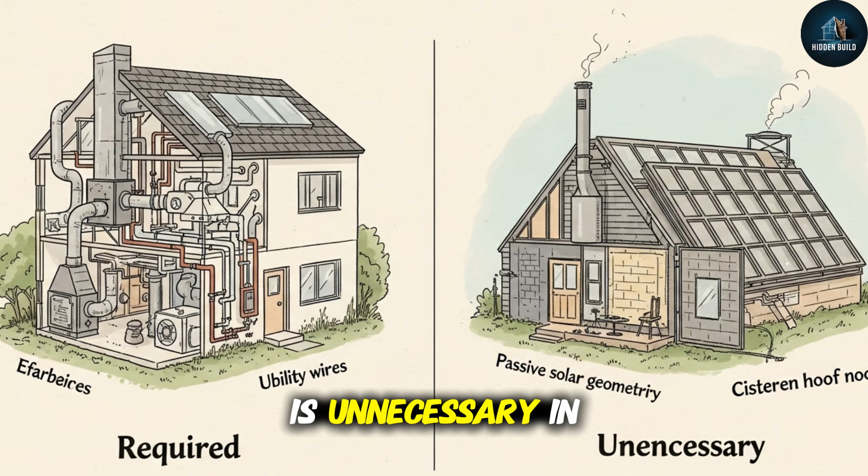The Earthship was not banned because the walls were unsafe. It was banned because the walls were unnecessary. Everything a modern house is required to contain — furnace, air conditioner, water heater, grid connection — is unnecessary in a structure built with adequate thermal mass, passive solar geometry, and a roof designed to collect what falls on it.

The codes do not require these systems because they keep you safe. They require them because they connect you to supply chains that depend on your monthly payment to function. The house that needs nothing is a problem for everyone who sells something.

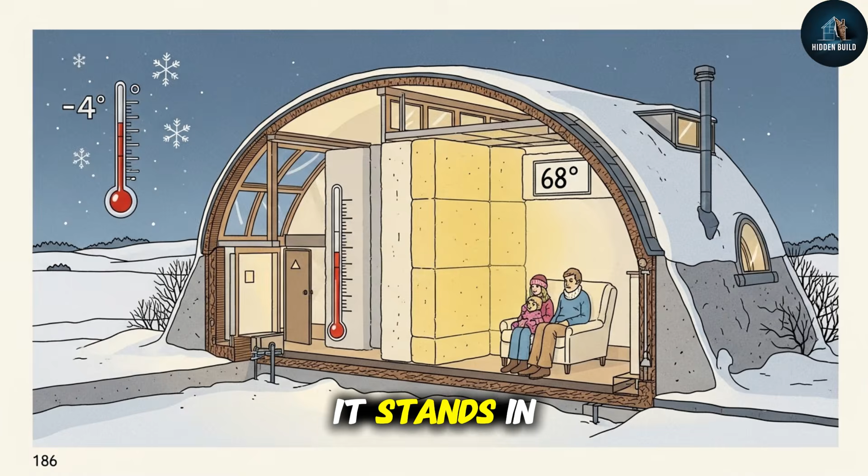And yet here it stands in -4-degree January, 68 degrees inside. Nothing running, nothing burning, nothing built. The movement it generated is global in a way that code enforcement cannot reach.

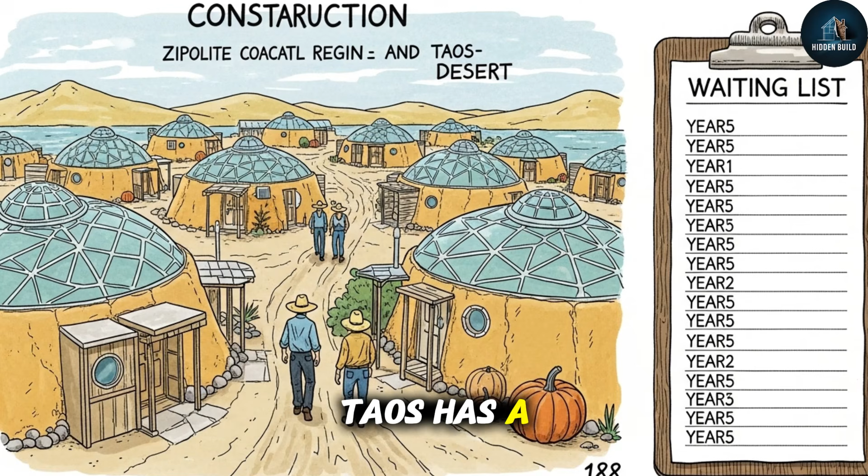An Earthship community in Zipolite, Mexico, houses 60 families. A community in Taos has a waiting list measured in years. An Earthship in the Drakensberg Mountains of South Africa, built by volunteers over 3 weeks, maintained interior temperatures through an African winter that locals called the coldest in 40 years.

An Earthship in the Scottish village of Kinghorn, built in 2004 by a group of volunteers who had never built anything from tires before, is still occupied and still monitored. Its thermal performance data is regularly cited by UK green building researchers.

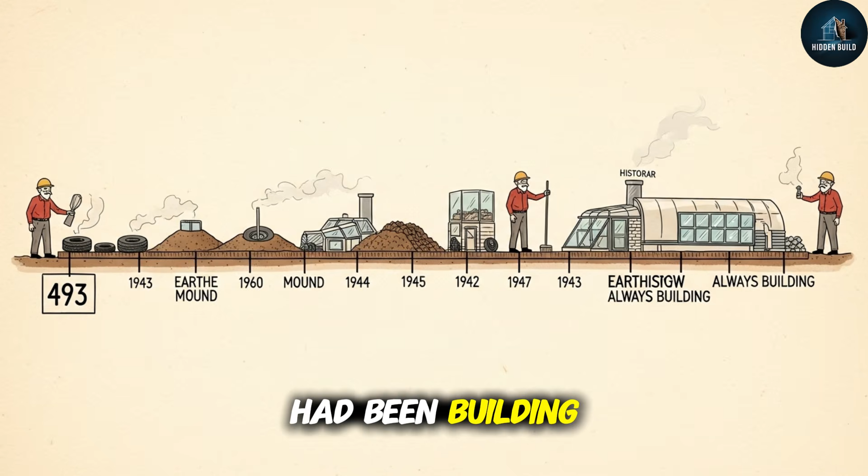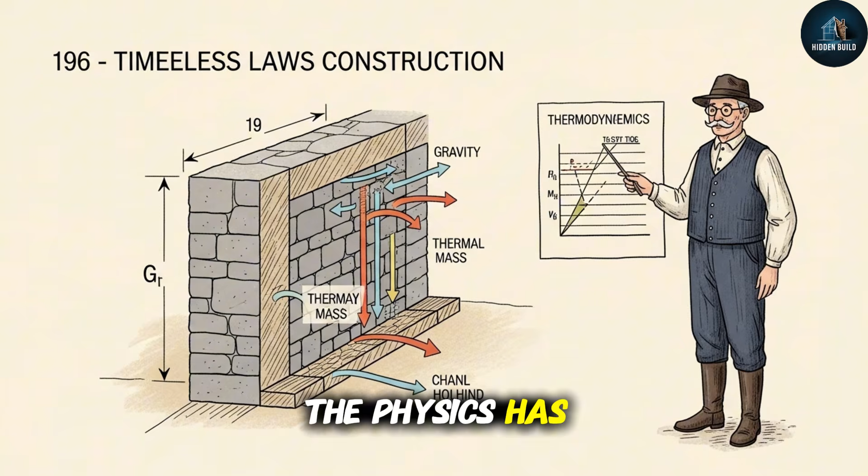Written by a private organization funded by the industries it benefits, updated every 3 years without modification, decade after decade, while the houses it prohibits keep standing and the energy bills it protects keep rising. The archive does not close here.

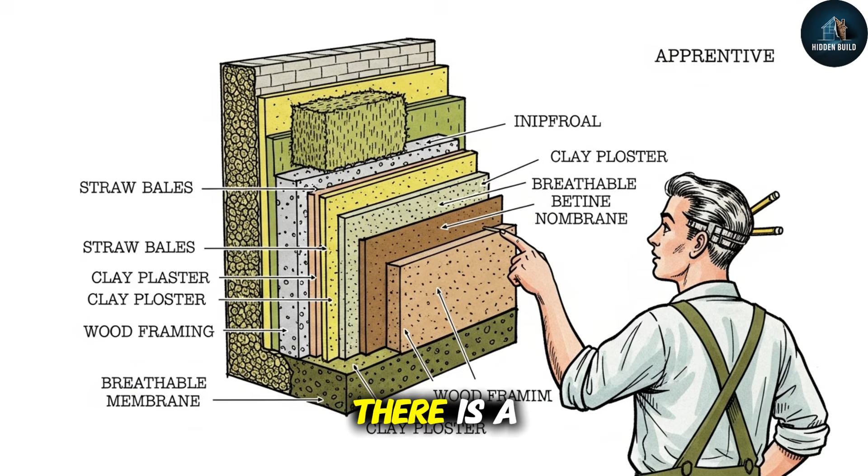Reynolds solved the energy problem. But there is a second problem older than energy bills, older than building codes, older than the International Residential Code, and every organization that writes it: the problem of the house itself — what it costs to build, what it costs before you ever pay a utility bill.

There is a construction method that solves that problem completely. It costs $300 in materials. It requires no licensed contractor, no engineered lumber, no approved supply chain. It is made from the earth directly underfoot. One structure built with this method in New Mexico has been continuously occupied for over 1,000 years without a single structural repair. And it was made illegal in 48 states, not because it failed, but because it was too cheap to permit.